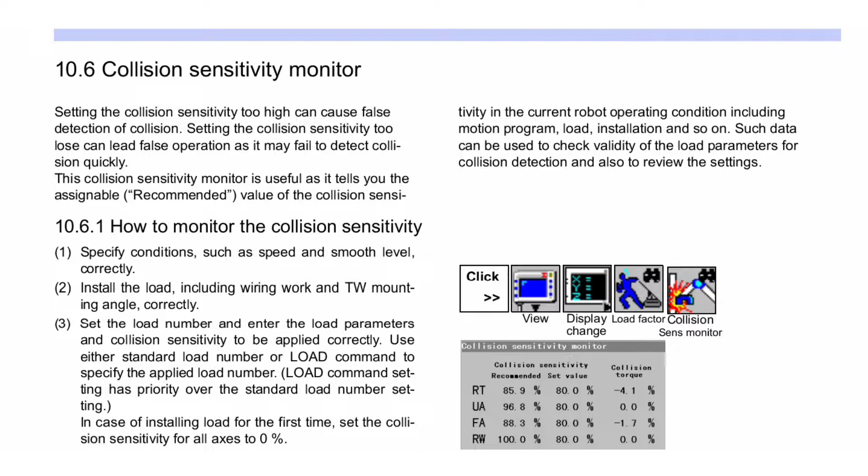Next, how to monitor the collision sensitivity. First, specify conditions such as speed and smooth level correctly. Second, install the load including wiring work and TW mounting angle correctly.

Third, set the load number and enter the load parameters and collision sensitivity to be applied correctly. Use either the standard load number or load command to specify the applied load number. Load command setting has priority over the standard load number setting. In case of installing load for the first time, set the collision sensitivity for all axes to 0%.

Fourth, open the collision sensitivity monitor and click the RST, meaning reset icon. Fifth, run all motion programs to be used. Use actual programs and repeat them; no special test program is needed. It is preferable to run motion programs with many motion cycles.

Friends, you can see all this procedure in this image. Here you can see: click View, Display, Change, Load Factor, Collision Sense Monitor.

Here you can see collision sensitivity recommended set value and collision torque. RT: collision sensitivity recommended is 85.9%, set value 80%, collision torque minus 4.1%. UA: 96.8%, 80%, 0.0%. FA: 88.3%, 80%, minus 1.7%. RW: 100%, 80%, 0.0%. BW: 73.1%, 80%, minus 16.9%. TW: 75.1%, 80%, minus 14.9%.

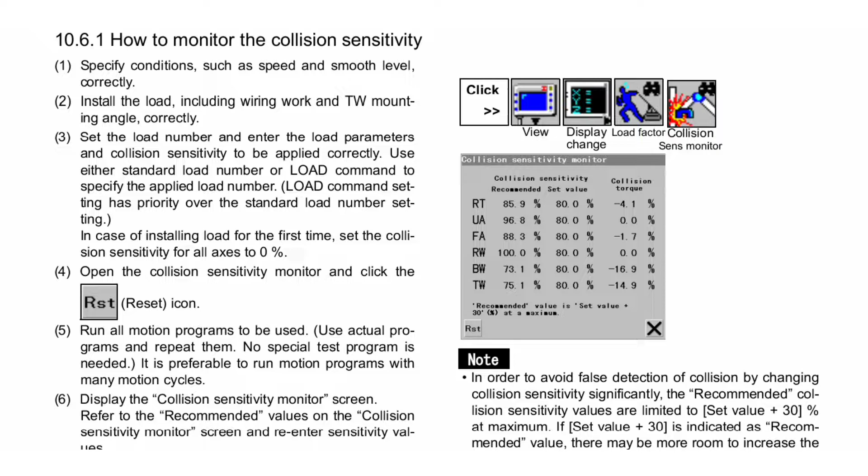Recommended value is set value plus 30% at a maximum.

Sixth, display the collision sensitivity monitor screen, refer to the recommended values on the collision sensitivity monitor screen, and re-enter sensitivity values.

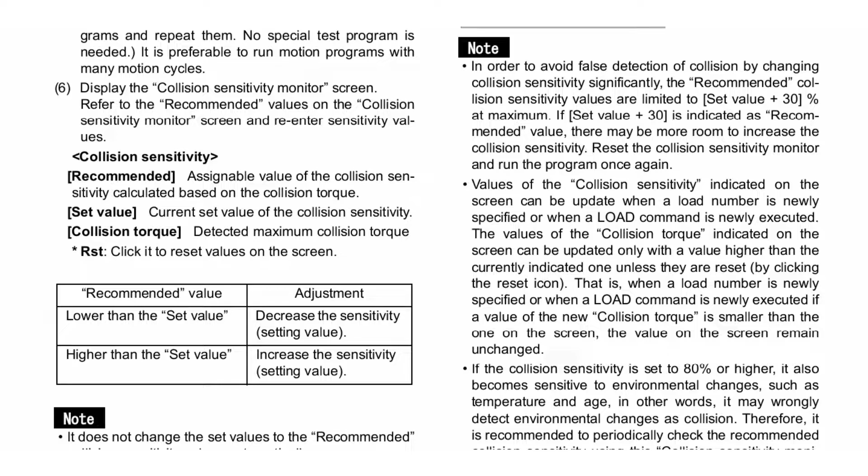Collision sensitivity recommended: assignable value of the collision sensitivity calculated based on the collision torque. Set value: current set value of the collision sensitivity. Collision torque: detect maximum collision torque. RST: click it to reset values on the screen.

If the recommended value is lower than the set value, adjustment decreases the sensitivity setting value. If it is higher than the set value, increase the sensitivity setting value.

Here you can see a note: it does not change the set values to the recommended collision sensitivity values automatically. In case there is more than one load, set appropriate load parameters for each load.

When a collision is detected, lower the collision sensitivity of the collided axis, and then monitor the collision sensitivity at the collided point to check the recommended collision sensitivity once again.

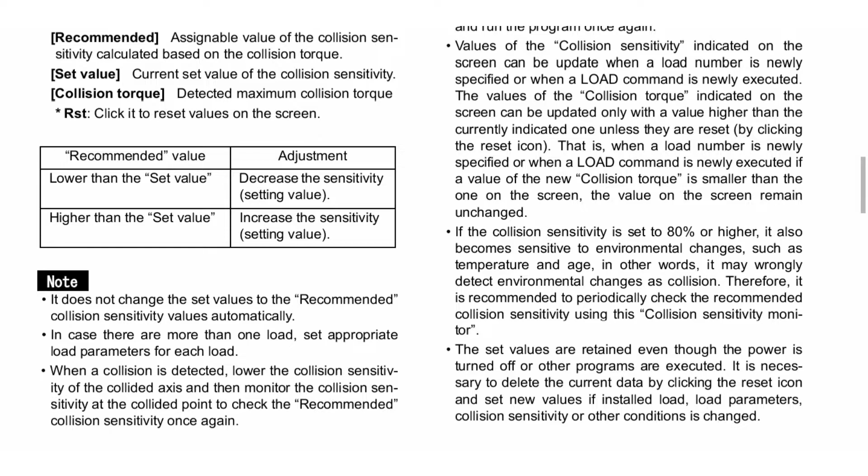Note: in order to avoid false detection of collision by changing collision sensitivity significantly, the recommended collision sensitivity values are limited to the set value plus 30% at maximum.

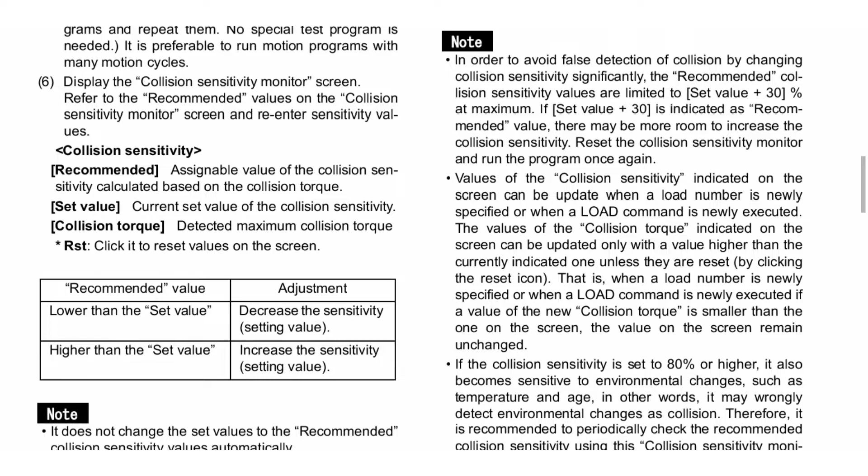If set value plus 30 is indicated as the recommended value, there may be more room to increase the collision sensitivity. Reset the collision sensitivity monitor and run the program once again.

Values of the collision sensitivity indicated on the screen can be updated when a load number is newly specified or when a load command is newly executed.

The values of the collision torque indicated on the screen can be updated only with a value higher than the currently indicated one, unless they are reset by clicking the reset icon—that is, when a load number is newly specified or a load command is newly executed. If a value of the new collision torque is smaller than the one on the screen, the value on the screen remains unchanged.

If the collision sensitivity is set to 80% or higher, it also becomes sensitive to environmental changes such as temperature and age. In other words, it may wrongly detect environmental changes as collision.

Therefore, it is recommended to periodically check the recommended collision sensitivity using this collision sensitivity monitor. The set values are retained even though the power is turned off or other programs are executed.

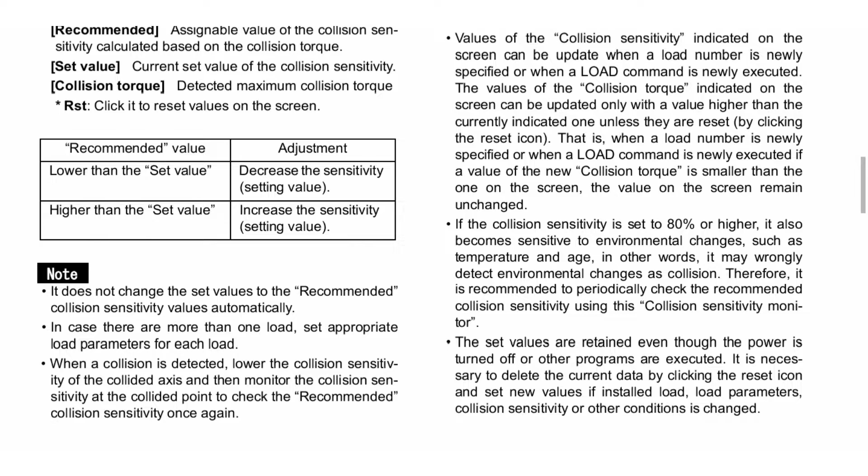It is necessary to delete the current data by clicking the reset icon and set new values if installed load parameters, collision sensitivity, or other conditions are changed.

Next is soft limit settings. The operable range of each axis can be limited by means of software. This is called a soft limit.

Enter the range of movement, minimum and maximum, of each axis. Click the default button to set the ranges for all axes to the maximum for the applied model. Click Set, Standard Settings, Soft Limit.

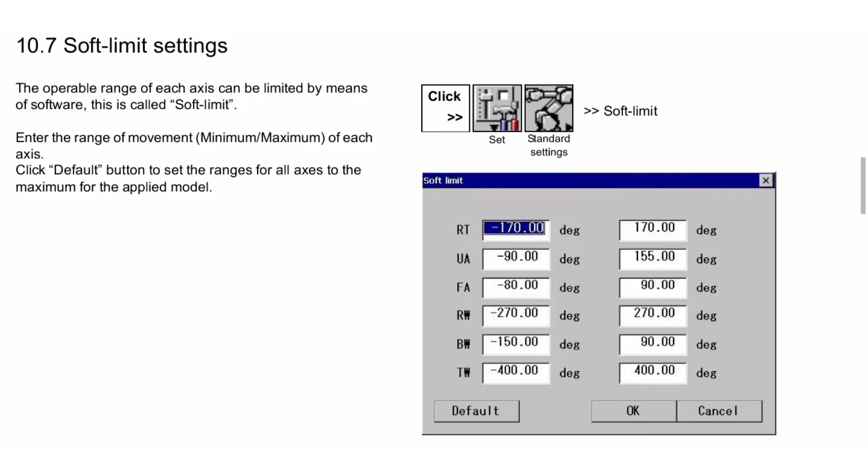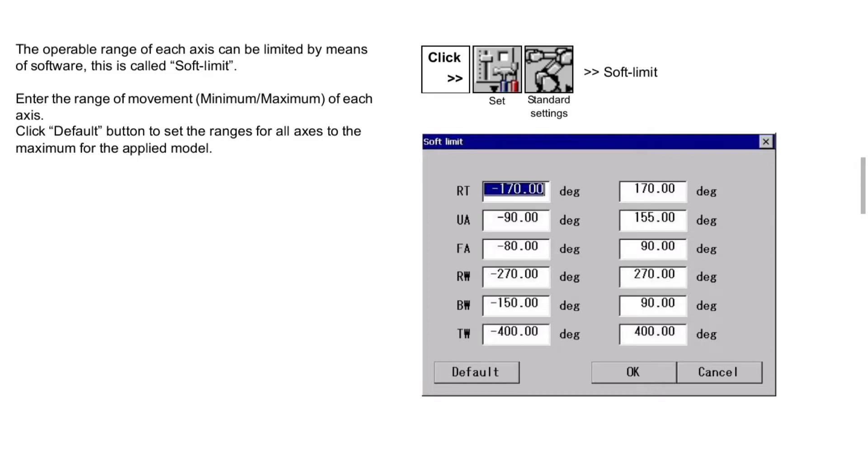Soft limit setting procedure you can see in this image. Here you can see: RT minus 170 degrees to 170 degrees, UA minus 90 degrees to 155 degrees, FA minus 80 degrees to 90 degrees, RW minus 270 degrees to plus 270 degrees, BW minus 150 degrees to 90 degrees, TW minus 400 degrees to 400 degrees. Default, OK, Cancel. Now next is jog settings.

Jog is a type of operation to move the robot a little at a time. The jog settings set the robot travel distance corresponding to the jog dial increment. Cartesian specifies the robot travel distance in Cartesian movement per one click of the jog dial. Rotational specifies the rotational locomotion angle of the robot per one click of the jog dial.